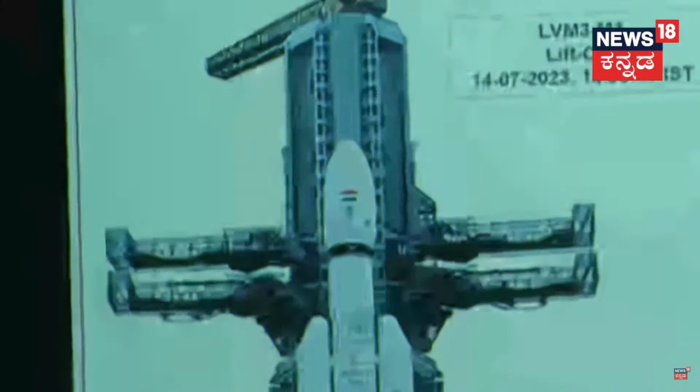This is the Mark III rocket, and it is this rocket that made this Chandrayaan landing possible. Without this launch capability, even Chandrayaan 2 was not possible, Chandrayaan 3 is also not possible. I am also very proud of the fact that I happened to be the project lead when it made its first launch, and also had the opportunity to work on this for long years.

Happy to see it's riding safe even after its 6th mission. The last mission was LVM-3 M4, which took off. We had this Chandrayaan mounted inside the payload fairing like this. Maybe I'll give you a little more detail of the rocket. This is a majestic lift-off of the rocket from the second launch pad at Satish Dhawan Space Center.

The two solid boosters are firing. You can see the mighty rocket taking off. This is 640 tons of mass, finally putting only 3.8 tons of the spacecraft into orbit. See the beauty of the rocket when it flies. Just for this pleasure of looking at it, we make it.

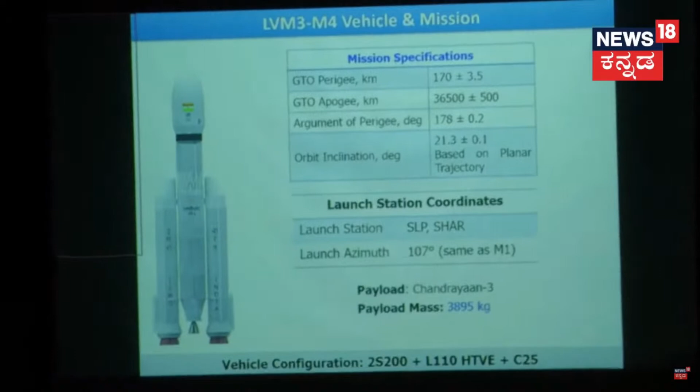The rocket puts the satellite in an orbit of 170 by 36,500 kilometers. That's a design orbit, but mostly the orbit we achieve will be off by a few kilometers in error. So that's the dispersion we indicated, which also has an orbital element associated with it. When I first saw this argument of perigee, which I never knew before I came to ISRO, I thought, why are they arguing so much about the perigee? So I asked Dr. Pradeep, I remember, what exactly is the physical interpretation of this, and similarly other orbital element terminologies.

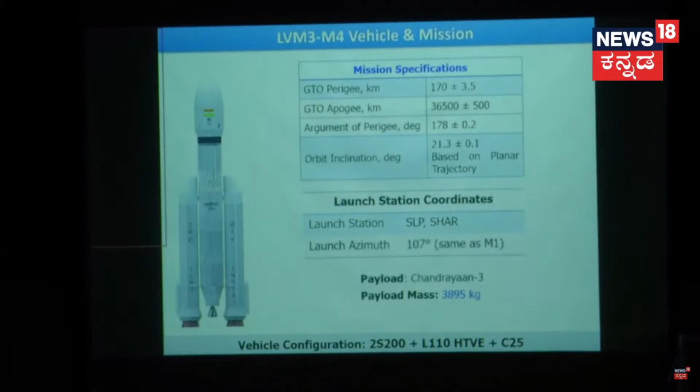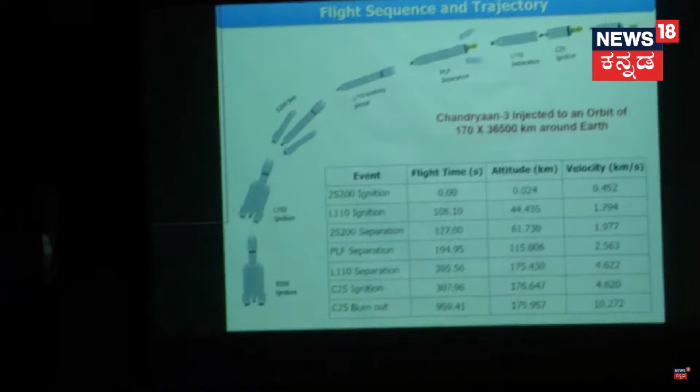Of course, that's the inclination, and we have a mass of 3,895 kilograms which has to be injected into the orbit. Now it has an interesting flight sequence. It starts with the solid boosters igniting, and once that's almost complete, the liquid stage kicks into action, with a transitioning phase managed properly by the control system. After that ends, the cryogenic stage comes on and takes it to orbit, injecting it at velocities of almost 10 kilometers per second plus.

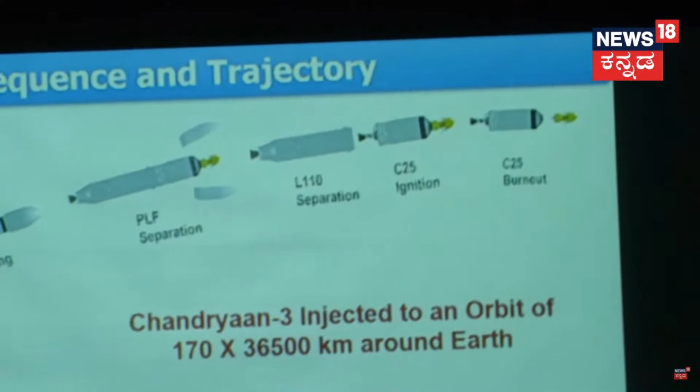So this puts it in an elliptical orbit around Earth with a specified argument of perigee as well as inclination. From that point, we track it, find out the orbit, and then do further velocity additions at the perigee point to increase the apogee height further and further until it reaches up to the moon. I won't go into all the details because that's not the topic here.

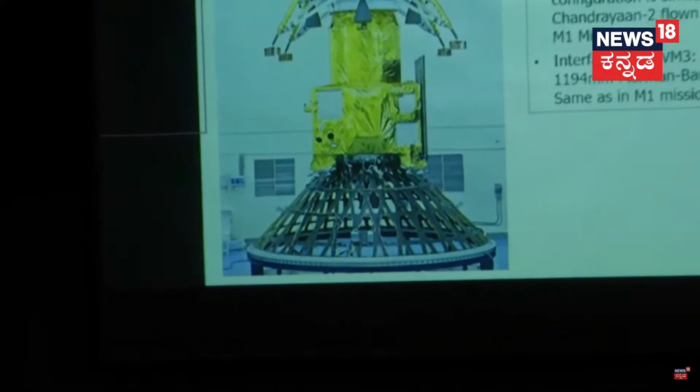So this is how Chandrayaan 3 looks like. You can see this part, which is called the rocket part, or the payload adapter. It's a lightweight composite structure capable of taking the mass and handling the dynamics and frequency constraints. And this part is the propulsion module, or the orbiter. It has a single engine at the center, which will take it from Earth to the moon's location.

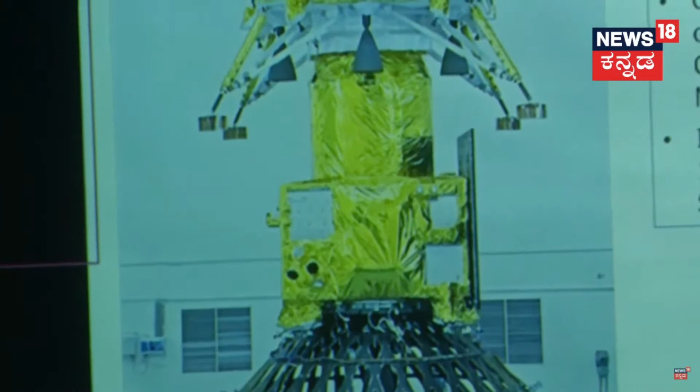The entire satellite is filled mostly with fuel, and the rest is the control system, sensors, and things like that. The most important part is the lander, sitting on top. You can see there are 4 engines here, and this engine is actually almost twice as powerful as the orbiter's engine. This develops almost 800 newtons of thrust, whereas the engine in the propulsion module generates only 440 newtons.

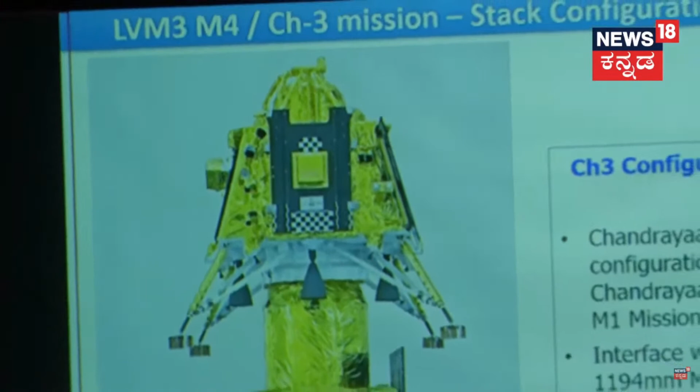So it's not a high-thrust engine that takes you from Earth to the moon, but landing requires a much more powerful engine and much more energy. Killing the velocity and working against gravity actually spends a lot of energy, whereas moving from here to the moon takes much lesser thrust and effort. On the craft, you can see these 4 legs, which are the landing legs, and this is the door which will open to bring out the rover. There will be a guiding sliding track through which the rover will come out, and this is one of the experiments placed underneath.

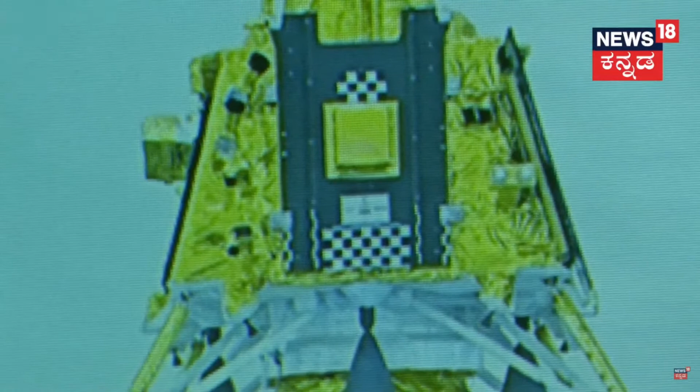Of course, this lander is fitted with so many instruments around it, which I'll explain later. So this shows some pictures of the assembly of the rocket.

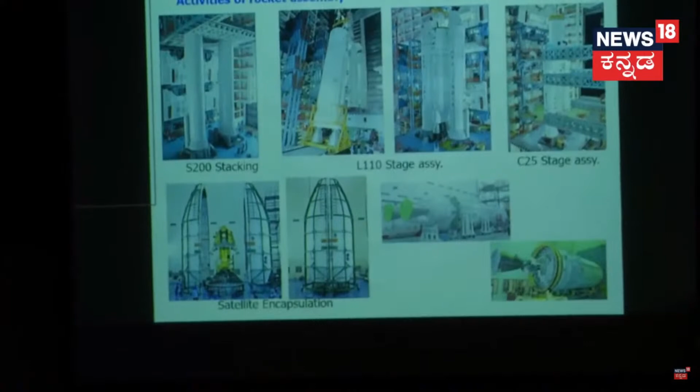Of course, those of you who have a habit of visiting ISRO's website regularly must be seeing all these pictures coming in, so I don't want to explain all of that. But the spacecraft is still very small compared to the payload fairing. You can see it has still more volume, but the whole launch is limited by its mass, not by the volume.

Now, before I go into Chandrayaan 3, it must be interesting to you to talk about Chandrayaan 2, because that prompted us to work on Chandrayaan 3. And in Chandrayaan 2, all the work we did, the good work we did, it actually...

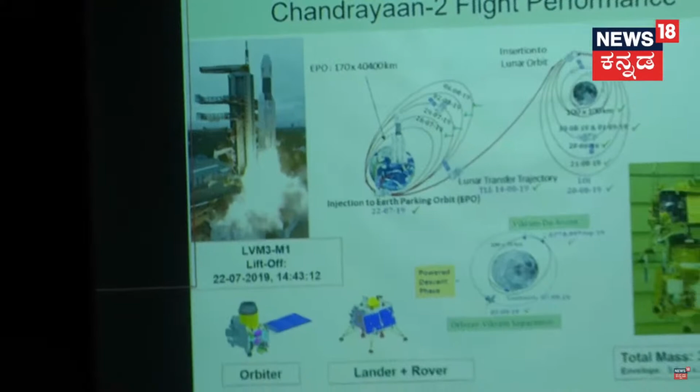All the way to the moon, almost correctly, it went into a 100-kilometer orbit. It did all the maneuvers, and only in the last part of the landing process we had the problem. It had the orbiter, which is still functioning on the moon with all instruments, and it is still giving a lot of scientific data. Of course, many people won't even speak about what the orbiter is doing. All the scientific objectives of the orbiter have still been met, and a lot of scientists are making use of the data. The lander and rover had few instruments, but they couldn't function because it ended up with a very high velocity. So I'll just quickly explain what went wrong with Chandrayaan 2 and what corrective actions we are doing in Chandrayaan 3 to mitigate all those problems.

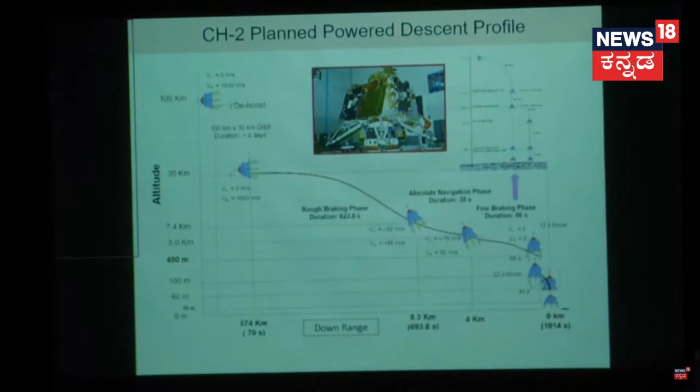Let me tell you this a little bit technically now. If you have no interest in flight dynamics, you can ignore this part. All the planning of travel of bodies across space is something very, very complex. It requires a lot of thought process and discussions and coming out with certain methods by which it can be designed. The problem in bringing down any object from space to ground is the ability to remove the energy contained in it.

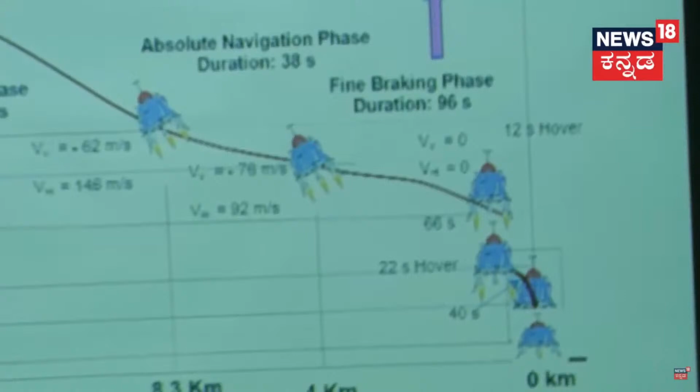The energy possessed by bodies at tremendous velocities is very high, the kinetic energy is very, very high. And it can be taken away only by some force applied in the opposite direction to remove all that energy. Either you use aerodynamics — when traveling through air, you can use drag as a retarding mechanism — but on the moon, there is no atmosphere, so you have to use only the engines to kill the velocity.

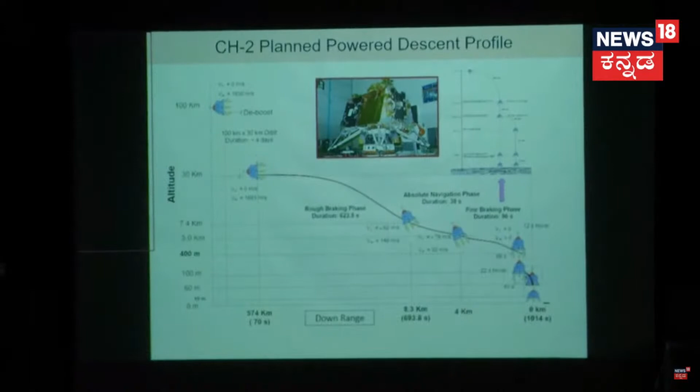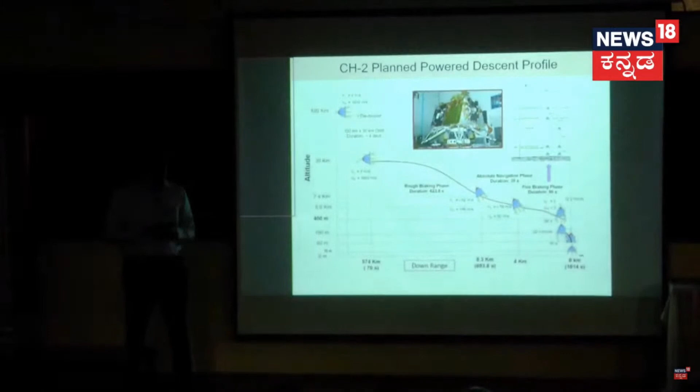And this velocity has to be killed in two ways. Any orbital object has tangential velocity with respect to the body about which it is orbiting, but ultimately it has to land vertically. So there will be a vertical velocity because gravity pulls it down all the time, and the moment you reduce the horizontal velocity, it will fall like a stone. If you want to stop it, you need to give velocity in the opposite direction. So the whole process of killing the velocity is continuous, with both vertical and horizontal velocities reduced in a controlled manner so as to reach a point of zero horizontal velocity and zero, or a reasonably low, vertical velocity.

So this is the trick, and how to do it is a very complex mathematical problem which requires fuel optimality considerations, the power plant capability, and the dynamics of the body — all these play a role. I won't explain that design process here, but what I want to tell you is that there is a process where we start at 100 kilometers orbit, and the velocity is reduced in such a manner that it results in an orbit of 100 kilometer apogee and 30 kilometer perigee.

From that point, it starts the descending process, called the powered descent phase. It is split into various phases, and this whole phase is designed with its guidance schemes, its control algorithms, instrument calibration, and feedbacks. Different instruments come into play at different times.

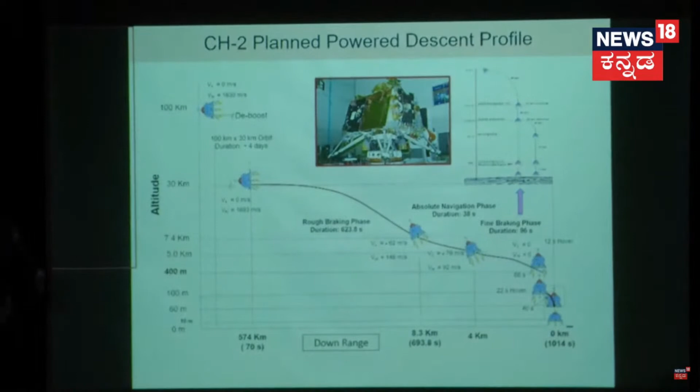When it actually travels here, you can't see the ground properly, so you can put a camera and see how high you are from the surface. All this calculation of where it is in kilometers is simply coming from the orbit determination from ground. Using radar, we track its trajectory and say it is at 30 kilometers. But what's the guarantee it is at 30 kilometers? It can be erroneous due to our tracking errors.

This is called relative navigation. You don't have any information of the local effects, you don't have any information of the terrain here. There could be a hill of a few kilometers, there could be a valley or something else, so really the height could be different.

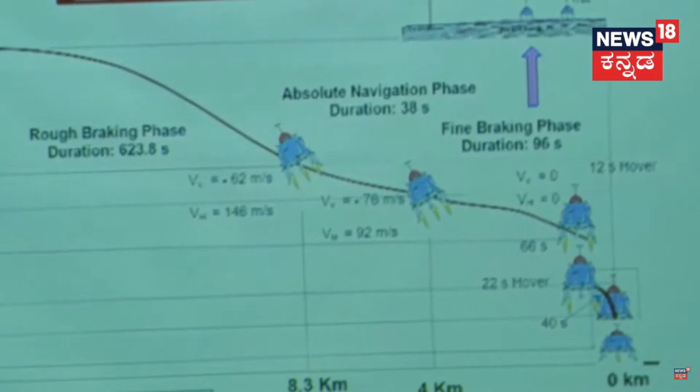So we have to use absolute sensors to find out what height it really is - either a radar altimeter, optical system, laser altimeter, or similar instruments. All this comes into play once it has reached a certain height where the sensors start functioning. Until then, we depend on the inertial system inside, which is a laser-based gyroscope that measures its position in the manner a typical inertial sensor does. So the whole process of traveling from here to here is a controlled manner.

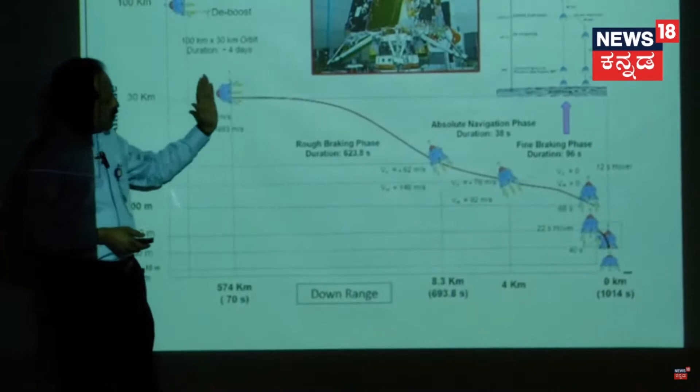The body will initially be like this. The engines will fire in a manner that kills all the horizontal velocity. By the time it travels, it has to slowly turn and reach orientations where the opposite velocity kills both the horizontal and vertical velocity. The moment you kill the horizontal velocity, the vertical velocity will start increasing, and you need to start killing that too. So this trajectory has to be carefully designed.

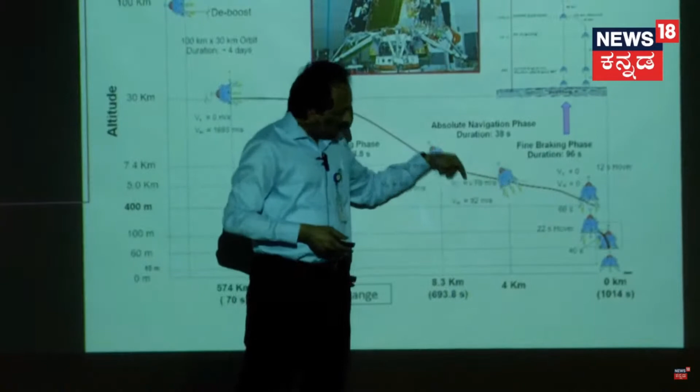Then there is a phase where we do certain instrument calibration, keeping the attitude the same. It looks at the ground and calibrates all its measuring instruments, to check if actually good data is coming or not. Then it decides to go for the final landing. At some point, it will also hover and confirm it is able to stay stationary, doing measurements to confirm how high it is from the ground. Then it makes the final descent with a certain fixed velocity.

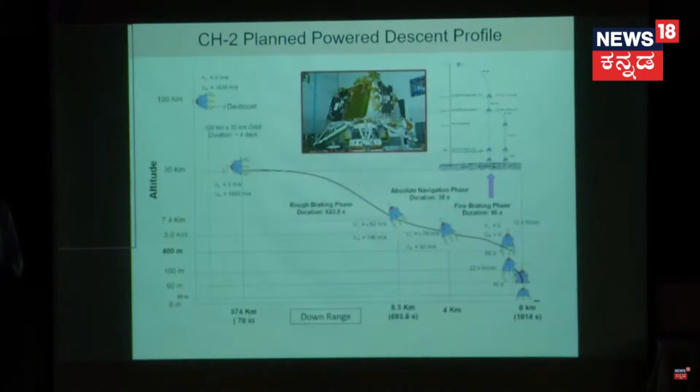So that was the algorithm, but there was something going wrong in Chandrayaan 2. I'll quickly explain that part - possibly some of you may follow, some of you may not.

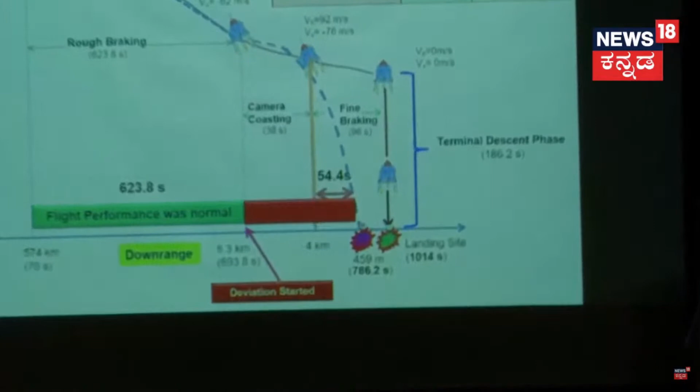It took many days for us to understand, because unfortunately this whole event happened on the Moon and we were not able to collect back the debris. Maybe one day somebody will go from India and bring it back - it's still there, so nobody will take it away.

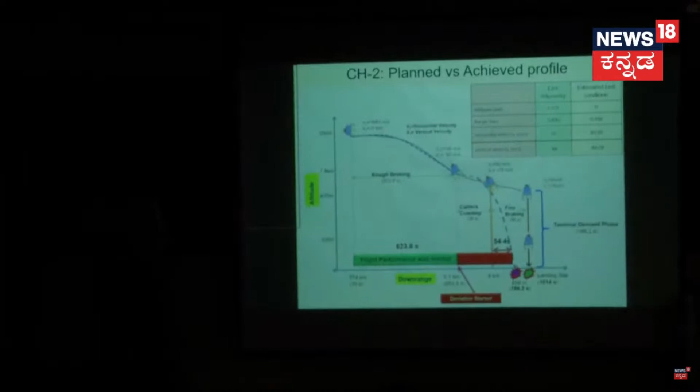But today we only have the physical reconstruction process of the sensor data, and also the hypothesis we put forward, which actually matches the observable data. From that we can synthesize what went wrong, and that could be the most probable reason for what happened - that's how any event can be reconstructed. So from the reconstruction we understand certain things, but I won't explain all of that today because I am still in a mission, Chandrayaan 3, and I don't want a backlash.

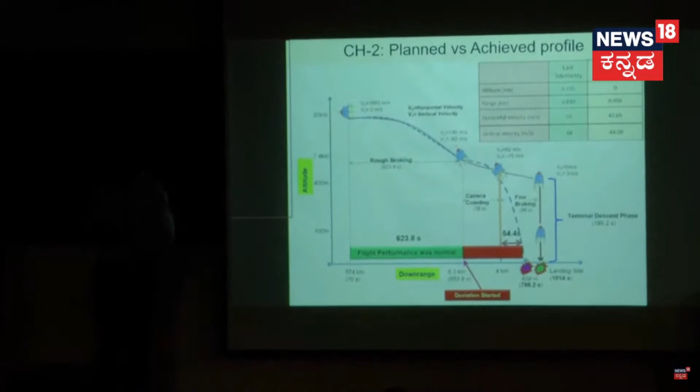So the whole of this rough braking process was really fantastic - everything was going right, not wrong. Everything was going wrong from this point onward. So I am marking it green, and red where it actually started - there is a deviation starting from this point.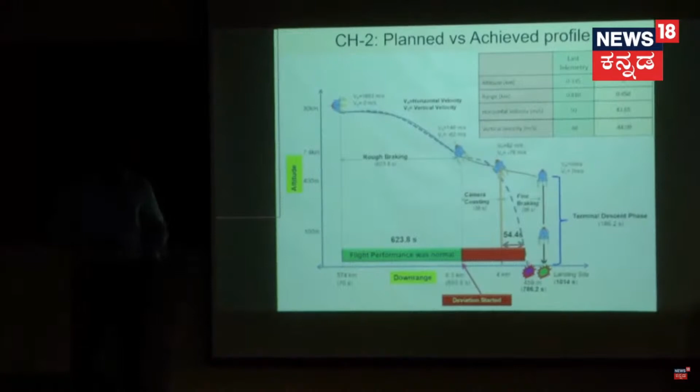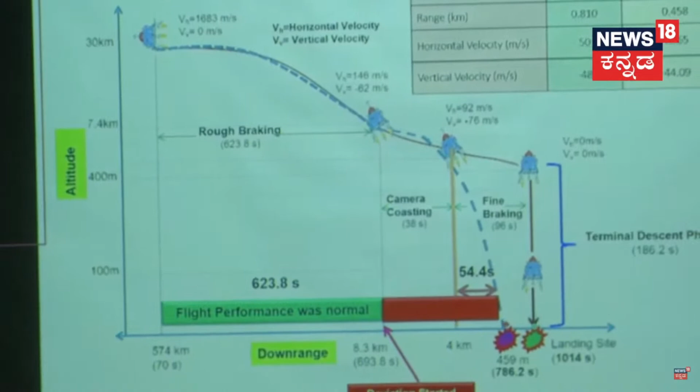The point where the deviation started is where we keep the attitude constant. The body position was kept constant, and it was doing a process called camera coasting - taking images of the surface and trying to correlate them with reference images inside. This process created certain anomalies which couldn't be recovered in the further process. Finally, the algorithm couldn't foresee the possibility of those things developing, and the intelligence available was not enough, or something went wrong there.

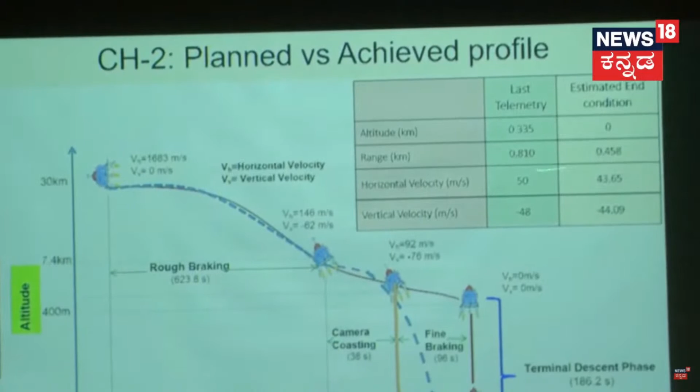Some software errors happened, algorithmic errors happened. We put unnecessary constraints which couldn't come out of it, so finally it ended up with a crash. The last information we received was at a height of around 335 meters, and the whole thing happened almost 800 meters away from the actual landing site. Less than that, we crashed. So that's what happened. Now I will explain a little more of the detail.

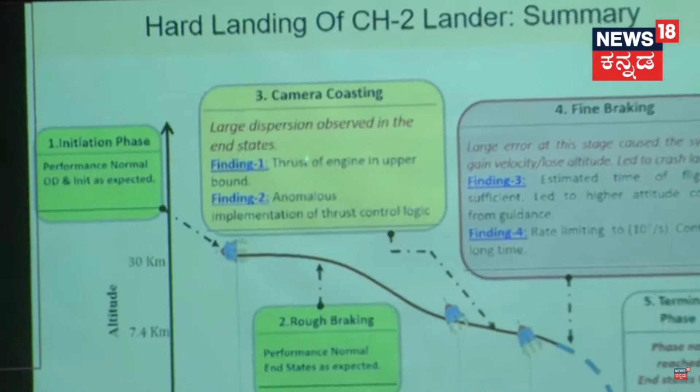The whole of the orbit was perfect, and it started — the camera coasting started — then only the problem started. The first problem was that the thrust of these 4 engines was slightly higher. It was slightly higher, but still within the bound of what the engine's thrust was supposed to be. But when this thrust is higher, there is a correction process for the total acceleration we should do.

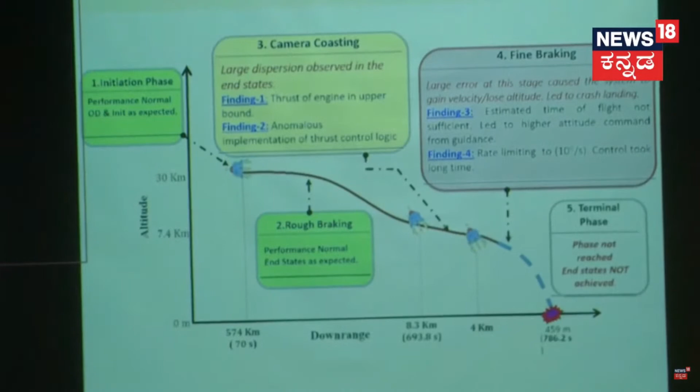The algorithm for correcting that was erroneous. The cumulative thrust was computed at the end, but it was supposed to be corrected, because there's a phase where attitude is kept constant — we don't want any undue control activity, because orientation may change. So importance was given to keeping the orientation constant rather than correcting these errors, which was a very costly decision algorithmically. We found there was an algorithmic error where the correction process should have been instantaneous. Then this problem would not have happened.

Then in the fine braking phase, large errors accumulated at the end of the coasting phase, which made the system incapable of correcting. It started correcting, but there was an artificial limit inside — the rate at which it could correct was limited to 10 degrees per second. We were allowing the craft only to turn at that rate. If it was allowed to turn faster, it possibly would have corrected. But the designers assumed there would be no demand of this nature, and that the system shouldn't unnecessarily rotate faster, so they kept an artificial, unwanted limit.

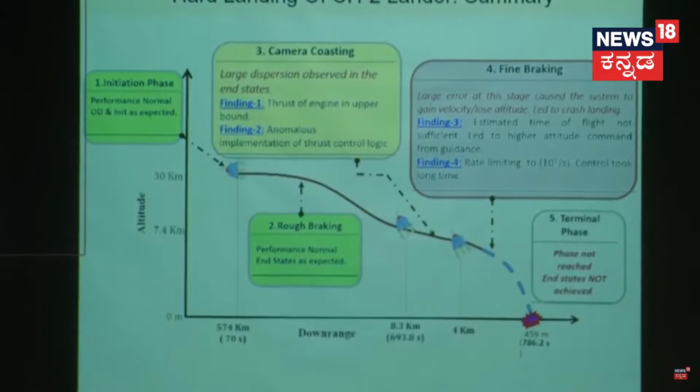That limited the ability to correct and come back to the required orientation — the time was not enough. When that wasn't enough, it found that it was not at the landing site, it was still far away. So the algorithm was trying to say, I want to go there. It was telling the craft to gain horizontal velocity and move there, whereas it already had high vertical velocity and wasn't able to kill that velocity. This created a confusing condition for the entire algorithm — it kept telling it to go and land at that point, but it was unable to go there.

Unable to kill this velocity, the computer computed the total time to go for the landing — there's an onboard algorithm to compute the time left, based on which the whole process is designed. That time happened to be lesser than what it should have been. A few more seconds, if the computed algorithm had given, it would have landed still safer.

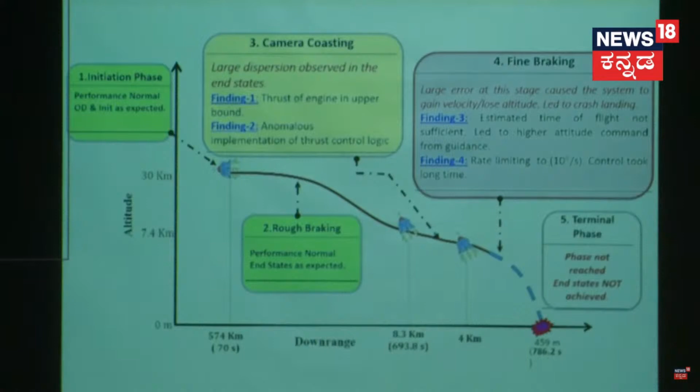I said it in very simple language — I don't know whether you understood all of these issues, but for the time being I will limit it to that much. So the essence of this problem was a wrong implementation of an algorithm onboard, and second, artificially limiting parameters unnecessarily without foresight of failure. The whole design was done based on a success-oriented approach, not a failure-oriented one. The moment you do that, such possibilities arise. This is the first lesson that came out of this.

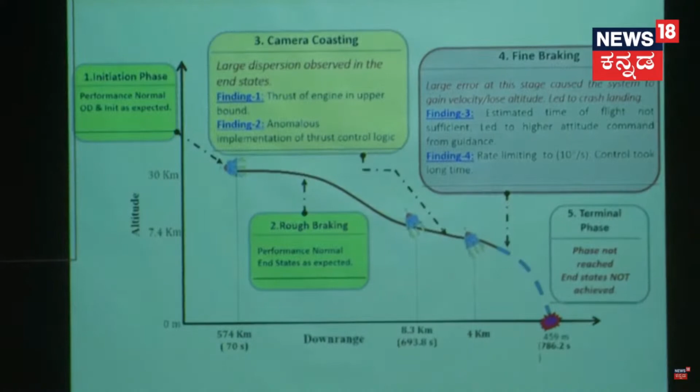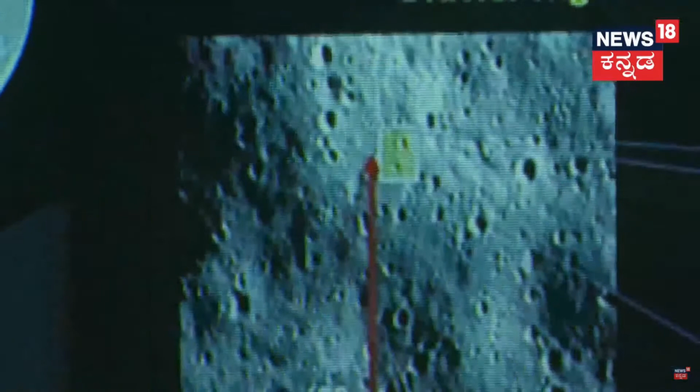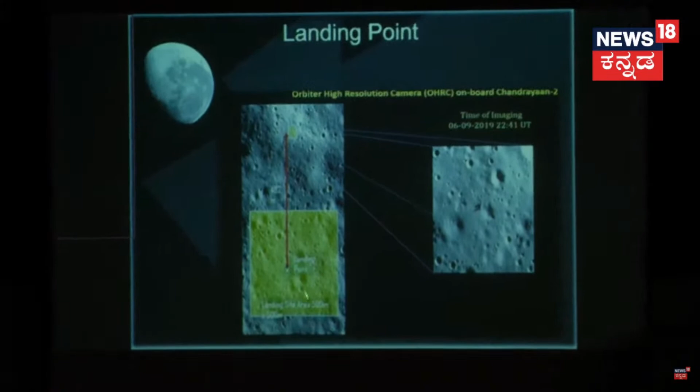This is an image from the high resolution camera on board Chandrayaan 2, which took this image. Hopefully we will be able to take images later as well. The lander actually crashed at a location very near a crater, but still a safer location if it had been a good landing.

But this was a landing point which was only half a kilometer by half a kilometer in size. We have done certain modifications to handle these problems I mentioned, and I will explain how we are overcoming them now. The mission objective of Chandrayaan 3 is the same: have a safe and soft landing. Without that, the next objectives cannot be met. We cannot do the rover coming out, we can't do the experiments. So the first and foremost objective is a safe and soft landing, and the entire approach is towards that.

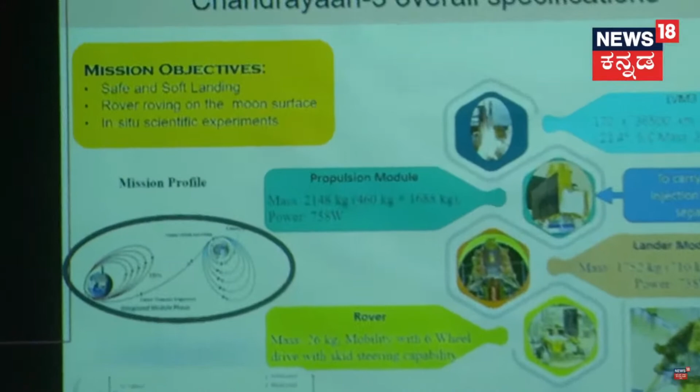The masses have undergone some changes. The orbiter-lander combination has changed a lot. It's not the same orbiter, it's not the same lander. We have made a lot of improvements: the lander became heavier and the orbiter, or propulsion module, became lighter. All the instruments that were in the orbiter last time are removed now because there's no need—there is already an orbiter there with all the instruments, and it has all the capabilities to handle the mission as an orbiter itself.

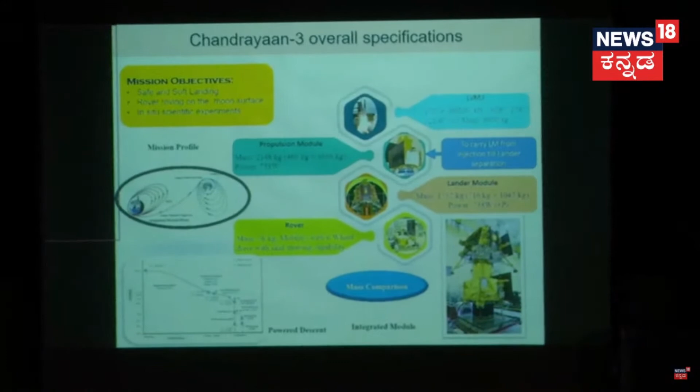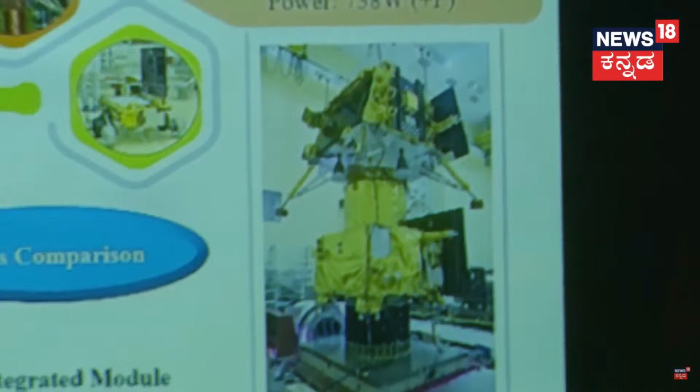So it doesn't have to have all the features of a typical orbiter now. We could reduce the mass of that, and all the mass we saved is added to the lander, along with more propellant. The tanks were stretched, we added more propellant, strengthened the legs, added extra solar panels, added new sensors, redundant electronics, and more powerful batteries than before. So the overall mass was nearly the same.

The entire process of moving from Earth to Moon remains the same, but the number of burns changes a little bit. And the landing process is entirely changed. I will try to explain that part in very simple language.

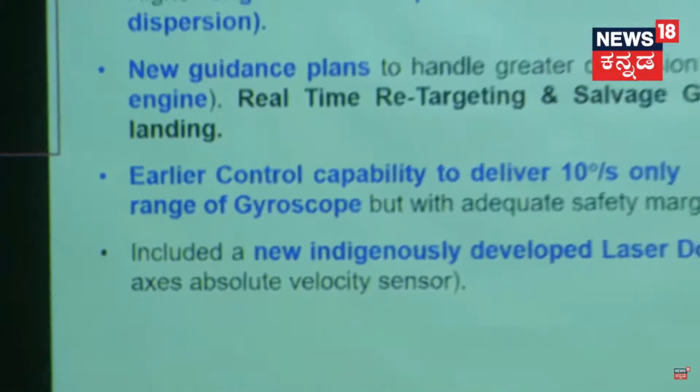Essentially, the changes are the following. First, we found out why the engine was developing higher thrust. Through extensive tests, we found there is a valve which controls the throttling of the engine—this engine doesn't work at constant thrust, it changes thrust based on the condition's need. So there is a valve which controls the flow of propellants, and this valve was not responding the way it needed to. If commanded at the highest rate, it didn't respond at that point. This was found out much later, and we reduced the slewing rate of this valve to achieve the expected response.

The logic errors in implementing the incremental thrust were corrected. The biggest error was that the instantaneous thrust regulation scheme was not there. In the camera coasting phase, there were accumulations of errors, but it was corrected only at the end, which is not the right method—it should have been corrected right then and there. So this implementation algorithm is the most important thing that, if anything, will save this mission for Chandrayaan 3.

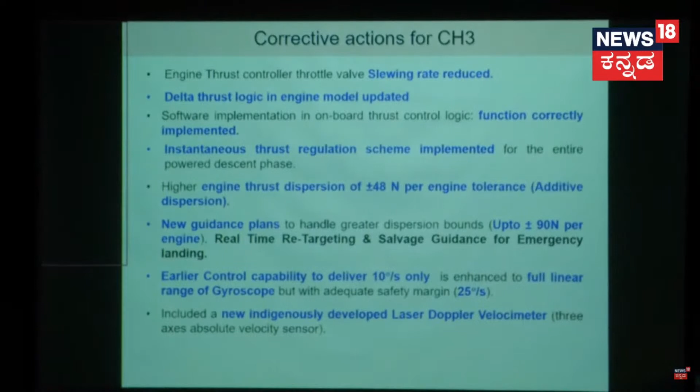We also increased the margins of the control system, or the ability of the guidance system to handle higher thrust dispersions—it went up to almost 90 Newtons per engine that we can handle. And even if any deviation occurs, it can retarget, salvage, and do emergency landing, which were not there at that time. For example, if the landing is supposed to be at a certain point and it knows it cannot reach there, it will land right there itself. This capability wasn't there before—it was always trying to reach that exact point. So we needed such features, and the artificial limits were all widened.

We widened things such that the initial conditions of the mission are also widened. Even if it is inserted into this algorithm with a larger dispersion, to the extent of even 6 sigma, it will still make a soft landing. This is how the whole mission is designed. The most important addition is a new instrument called the laser Doppler velocimeter, which gives absolute measurement of velocities in 3 directions using a sensor mounted on the Chandrayaan.

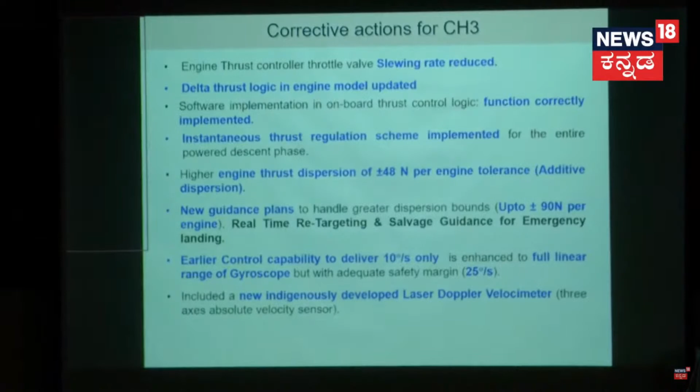So we know its velocity exactly, so it can plan properly, which was a very important instrument in all moon missions. This instrument used to be there, and we tried to get this instrument from outside, but we couldn't buy it last time in Chandrayaan 2. We understood that if Chandrayaan 3 has to happen, this instrument is mandatory. It was developed by ISRO people in our own laboratory in record time and qualified to be one of the best instruments today.

There were also a lot of corrections we did in software. It's not proper for me to explain all of this, and I think it may not be needed. But essentially, what we look at are simulations. Anybody who works on such software will understand there is nothing ideal in the world. Nothing works in the nominal case. Everything is over a distribution.

In a statistical sense, many parameters - mass, center of gravity, the control system, the thrust, the sensor data, the gravity - everything is actually probabilistic. So when you study any mechanical or dynamical system, you need to look at the probabilistic nature of the problem and simulate, in a Monte Carlo sense, what can happen as scenarios evolve. Here you can introduce failures of various systems, redundancies, etc., and see what path it will take next.

So we focused this time on extensive simulations. Generally we look at nominal plus certain sigma dispersions, but we also looked at additive extremes of all critical parameters - what will happen, what are the limits of performance that can trigger failure. We also looked at up to 6 sigma perturbations. I know at 6 sigma many things may not survive, but there are failure cases even there.

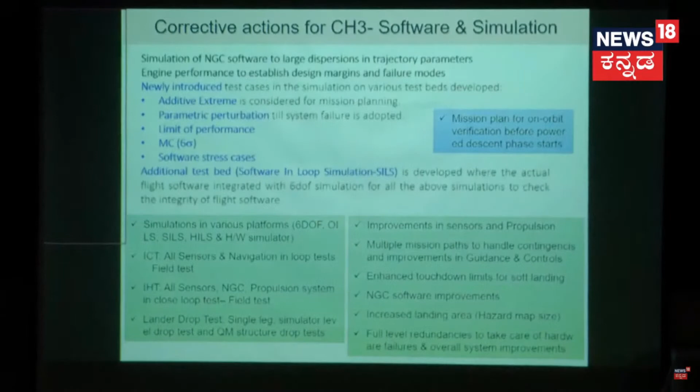We are also stressing the software for test cases where failures can occur, triggered by computational errors. We created additional test beds in various labs - hardware and software test beds - to verify the software and hardware are very good. So the whole focus of the last few years was on simulation and getting guarantee of the whole implementation.

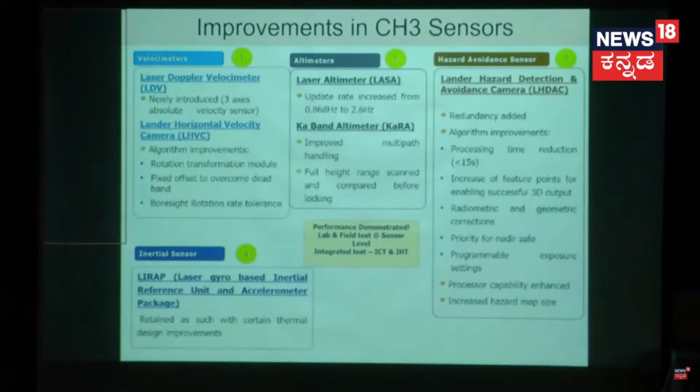Many of the sensors are working - absolute velocimeters, laser Doppler velocimeter, which uses a laser beam for this. There's a camera-based velocity detection scheme which takes images based on pixels - you can compare one image to another and detect the velocity. There are two altimeters, one works on laser and another works on RF-based Ka-band radar altimeter. Both work on reflections and estimate the height, and all the specifications have been much strengthened.

There is a hazard detection camera - this is again an interesting camera. Once it is about to land, it has to see there is no boulder or crater, and we need a certain area devoid of these issues - only there can it land. If at the nadir, looking straight down, it finds it's not safe, it will immediately choose to move horizontally in any direction, provided a safe zone is available 150 meters away - this is the algorithm. If that is so, it will move and go up to 150 meters; if it's beyond that, it will land there itself. You cannot go beyond 150 meters because the fuel available is just not enough to go further. So this camera is essential.

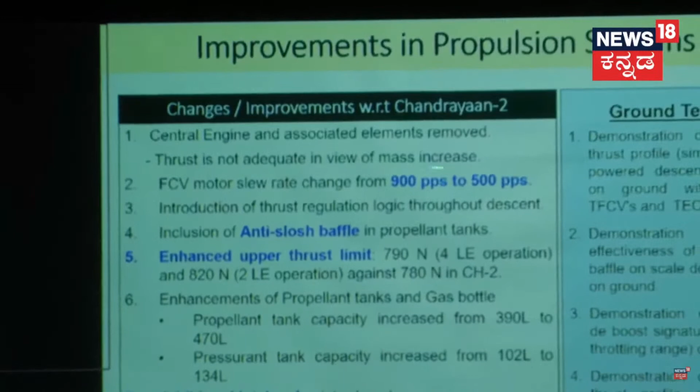There were a lot of changes in the propulsion. I mentioned the rate at which it is corrected, which we call pulses per second. It was originally 900, reduced to 500, which makes it a little sluggish, but for the dynamics it is good enough. We found that the sloshing of the propellant inside the tank can create control structure interactions, because propellant in a tank which is half filled can oscillate and make the body of the satellite move. So we have to suppress that by giving damping.

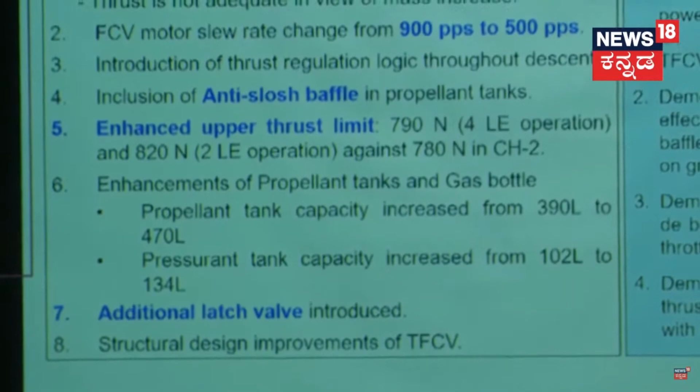We have also changed the thrust limits and the structure of the propulsion. I don't want to go into all of that, but this has been tested extensively to confirm that the changes we made in the propulsion are good enough.

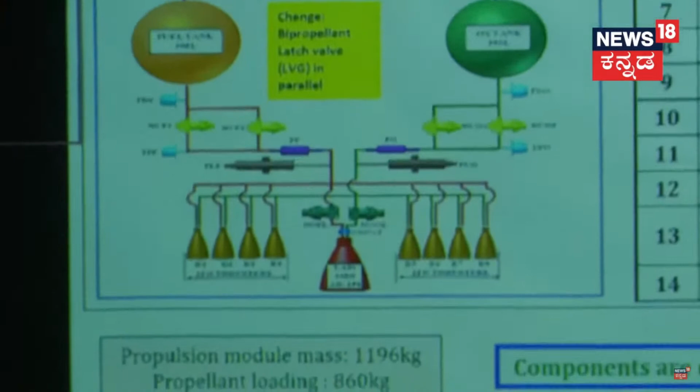So the propulsion system will look like this. This is for the orbiter side. There is a single engine and 8 small engines which actually do the travel from Earth to Moon, and until capture this is used. There's fuel, oxidizer, its own regulators, valves and things like that which operate on command, and each of these engines is operated by its own valves. So it's a very complex circuit with many elements which powers the orbiter.

Same is the case with the lander. The lander has 4 engines and its own thrusters that control it. It's almost similar to the orbiter, but the engines are much more powerful here, because the amount of energy that needs to be killed is much higher.

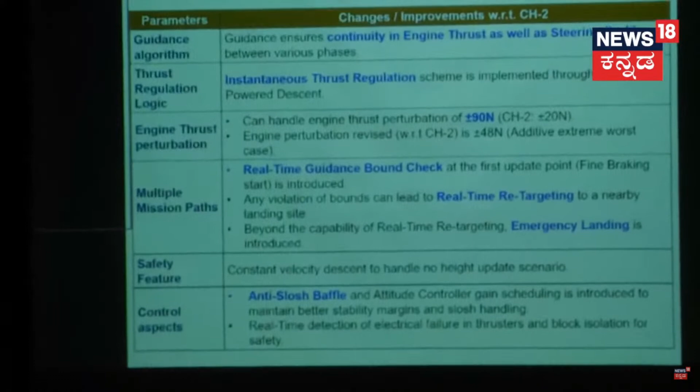Now, in the guidance and control, there has been a lot of contribution from the Indian Institute of Science. Professor Padhi is here; we had extensive work with him and his students who are in ISRO, and they were the people who actually worked on and developed this guidance scheme.

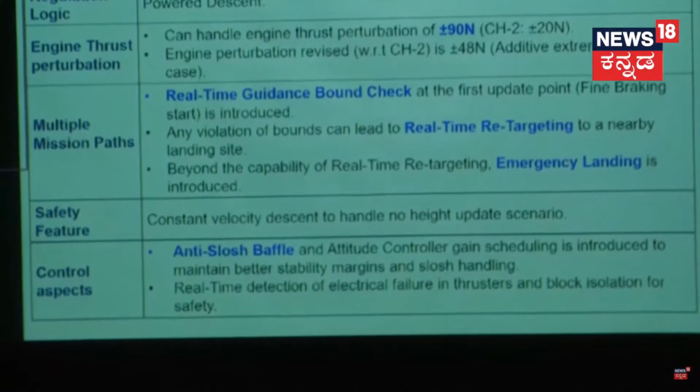Major changes have been made in this guidance scheme today to handle various issues we encountered. One is the continuity of the engine thrust profiles, and also the regulation scheme, the perturbation I already mentioned, and looking at multiple mission paths in case of anomaly—the safety that has been built in, the control I have already told you. So for brevity I am not going into the guidance algorithm at all. Maybe you can ask Dr. Padhi to give another talk at some other point on the guidance algorithm, because if I start speaking he will have objections.

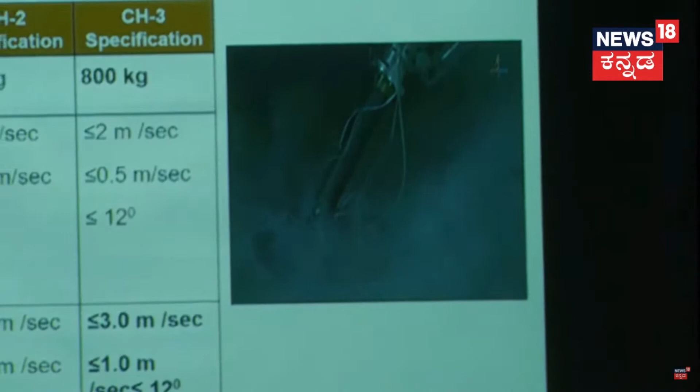Now coming to the touchdown point of view. Earlier the mass of the Chandrayaan craft was 700, now it is 800 by the time it touches down. What we have done is the overall energy absorbing capability of the legs has now been improved. But of course the velocity is too high—none of this will help us, because hitting at 10 meters per second, or 40 meters per second like last time, is not going to help us.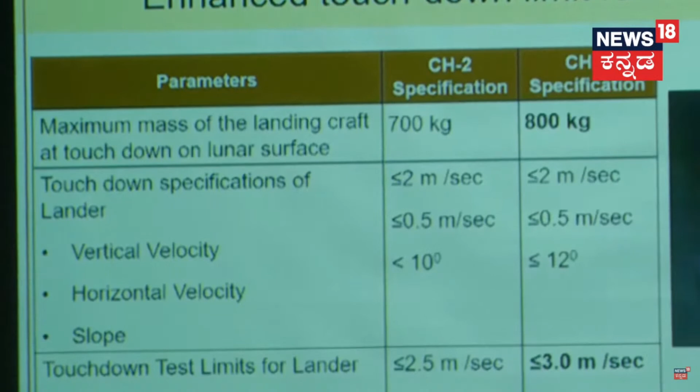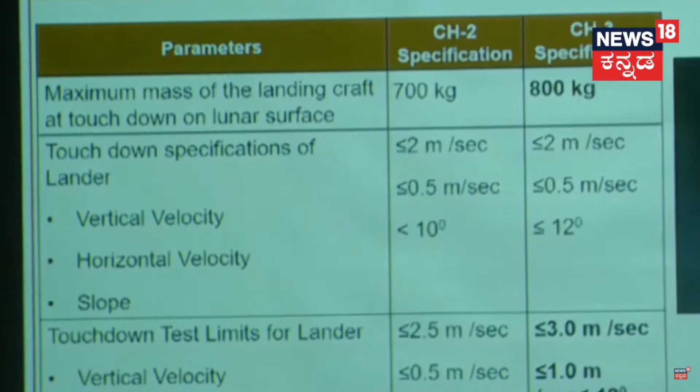So what we did is, last time the upper limit was 2 meters per second, this time the upper limit is 3 meters per second plus. So it will be able to handle up to that velocity, because the energy associated with fast-falling objects is too high—you'll know if a stone falls on your head, only then will you realize how much energy the stone got. So killing that much energy is actually very difficult. There are certain energy absorbing, crushing, damping systems incorporated in the legs to handle this.

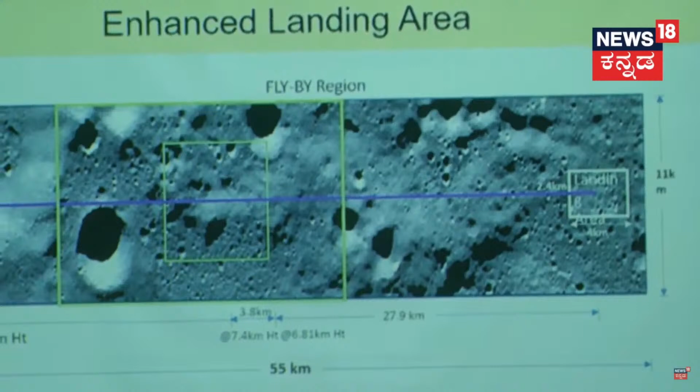Another important change we made is the landing area is now expanded. The most important gain we got from Chandrayaan 2 is that the entire image of the Chandrayaan moon surface is now available at a resolution of 28 centimeters—I can see 28 centimeter sized items in 1 pixel. So that much accuracy imagery is now available for the entire moon. Using that, we have made a beautiful map, and the whole area where we are going to land is now expanded. The entire track is now observed to find the best track to land, and we have selected a landing area typically 4 kilometers long and 2.4 kilometers wide.

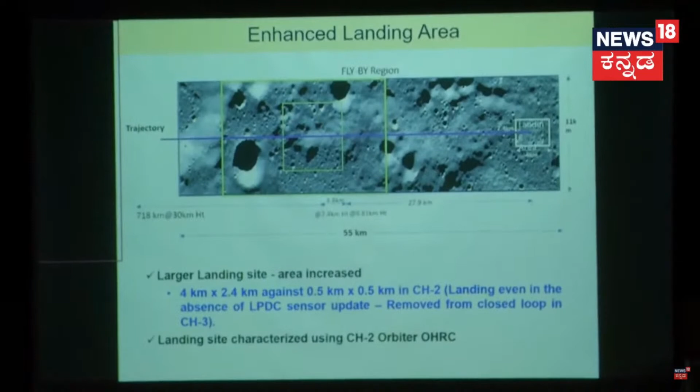Last time it was half a kilometer by half a kilometer. So it has a larger area, and this area selected has no huge craters or boulders, so it is safer. If you're not able to land at the middle of this point, anywhere landing could be possible. So this is one important change that we made.

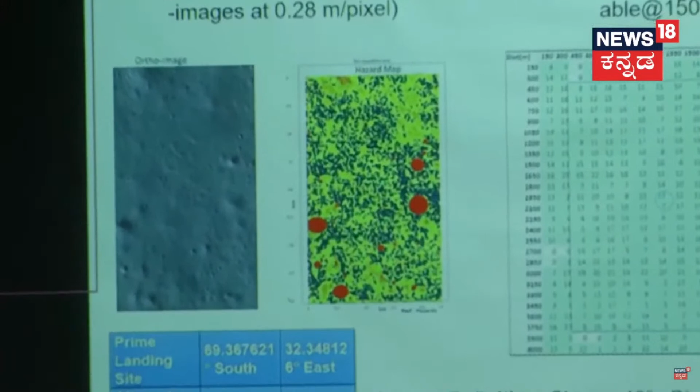So the entire area is now gridded and mapped. This information is staying within Chandrayaan 3, already stored on board. So whenever it takes a picture of some location, it will compare with the onboard stored image, and if it can correlate based on feature matching, it can say I am here now.

So the rest of the travel is well defined. It will be able to assign its coordinates to the area in which it is measured, and quickly match with this. If the matching doesn't happen, that is a failure mode, and we need to handle it.

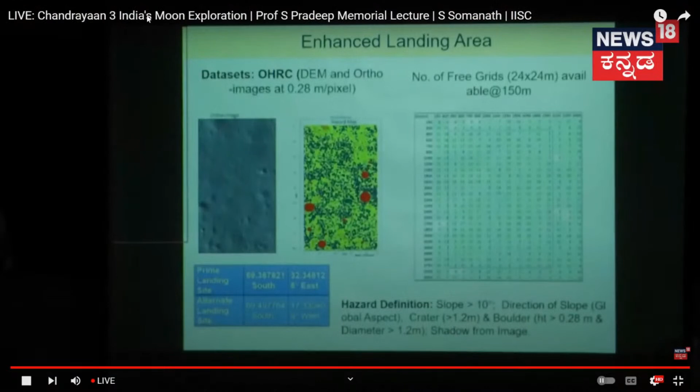Energy power is only the sun, nothing else available on the moon. So that is the criticality of landing.

Now, on the software side, there were many changes on the navigation, guidance, and control software. I won't explain this so much because it may not be of great interest to you. But the most important general improvement, which could be helping us, is the structure. After the landing, we understood that we needed to beef up here and there in some places, and that has been done.

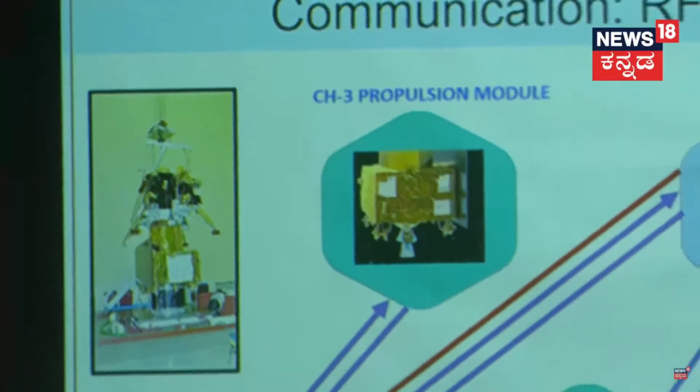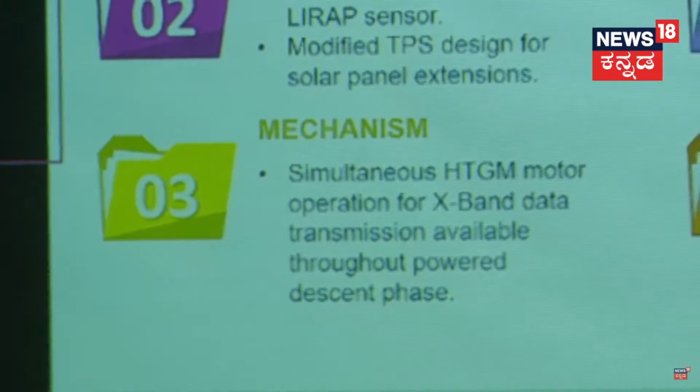The thermal environment of the entire craft has been revisited because we changed our solar panels this time. New solar panels are added for energy generation, requiring more thermal analysis. The mechanisms have been strengthened. The radio frequency communication protocols on board were limiting last time to send data, so the rates have been increased to almost 200 kilobytes per second, 500 kilobytes per second. Also, images can come at a faster rate now. The power side has also been strengthened, the ability to generate more power, and the battery capacity has increased.

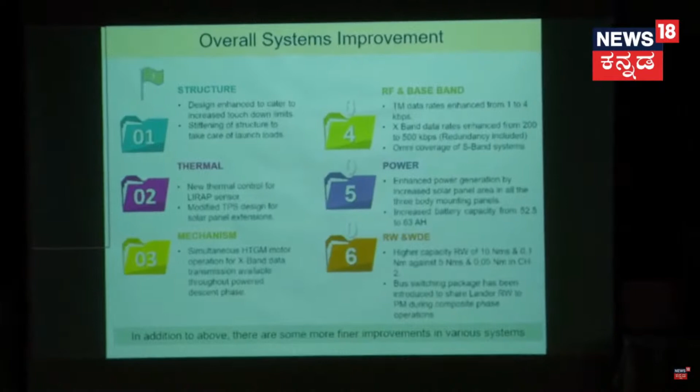The wheels are what actually control it—reaction wheels, we just call them wheels. The wheels inside spin at very high speeds to generate control moments when thrusters are not firing. So these wheels, their capacity is almost doubled now, to handle orientation changes much faster. These are some of the major changes we did.

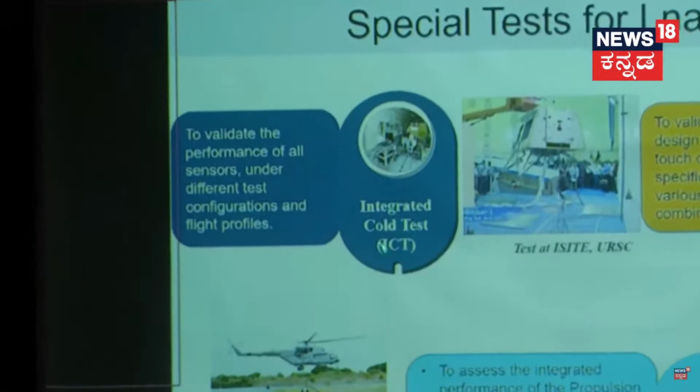And the most important part is testing. Before we went into the Chandrayaan 3 launch decision, we did hundreds of tests, but I'll classify them into 3 categories: the integrated cold test, integrated hot test, and landing leg related test. I'll explain some of this a little later, and the facilities and work we did to validate the design on ground. If you want to test on ground anything designed for the moon, what are the challenges?

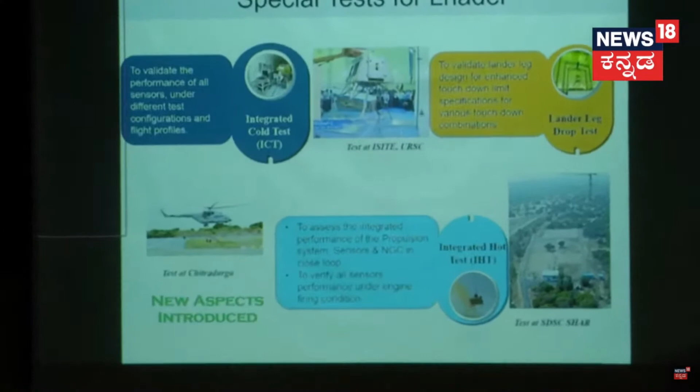Gravity, of course. And how to create a reduced gravity environment here—is it possible? It is possible, to some extent. You can put a counterweight.